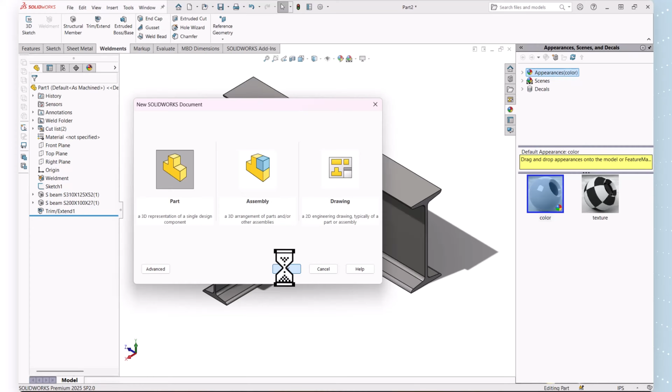So, let's begin. First, we'll change the appearance of the model as per our requirement, so it looks clean and easy to understand. Next, we'll change the unit system from IPS to SI because we are working in millimeters and metric units.

Now, select the required plane and start sketching the layout exactly as shown on the screen. This sketch will act as a path for our structural members.

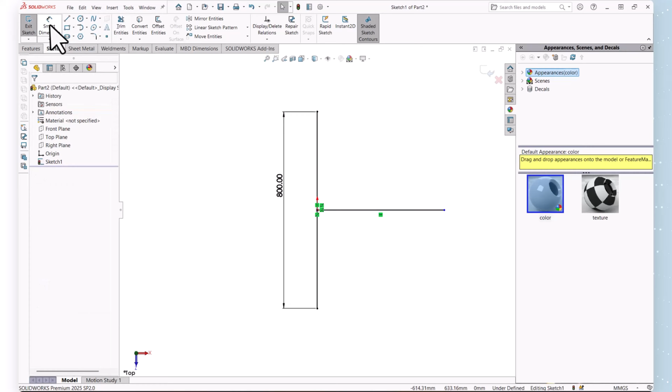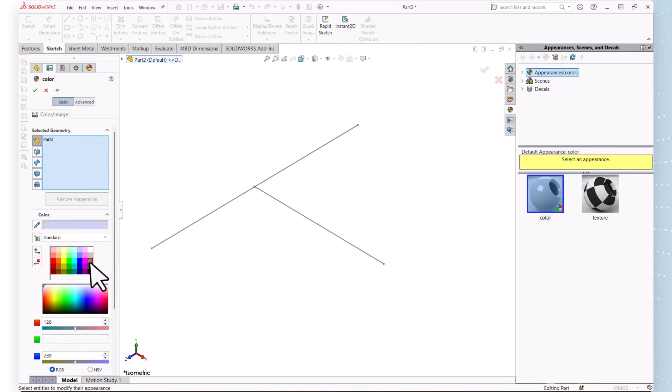After the sketch is ready, go to Weldments. Click on Structural Member. Then select DIN, choose S-beam, select the required beam size, and apply it exactly as shown in the video.

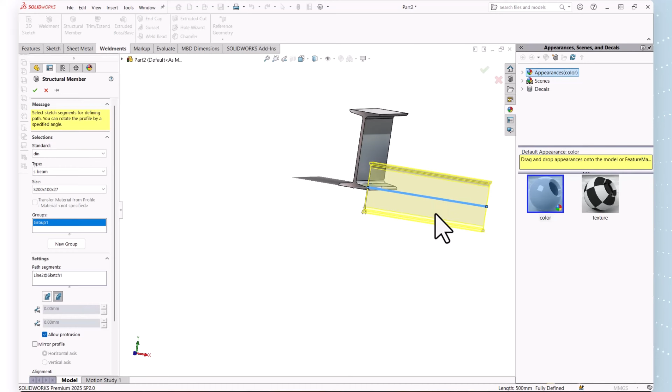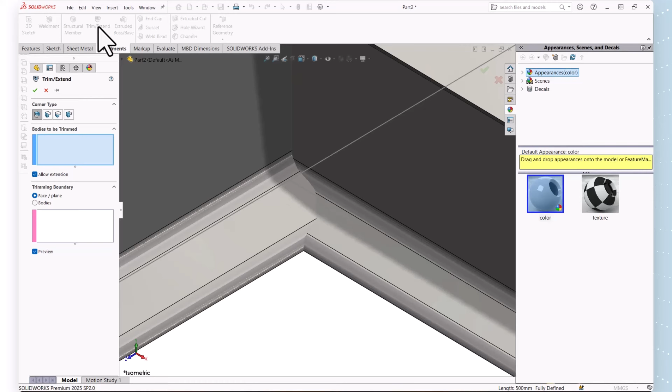Now comes the most important step, trimming the beams properly. Go to Trim Extend. As you can see, we have selected the beam to be trimmed and the boundary beam as a reference. Based on these selections, SolidWorks will automatically trim the joint correctly.

Watch carefully. When we apply trimming, you'll notice the beam end updates instantly and the joint becomes clean and fabrication ready.

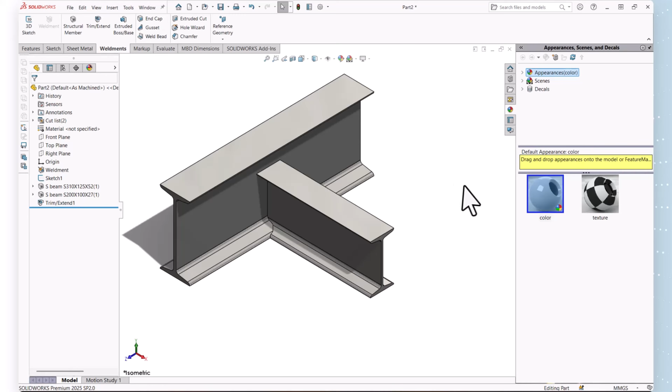Once trimming is completed, we'll start the welding process. Now go to Weld Bead. Select the required faces as per the video. Set the weld size and apply the weld bead on the joint.

And that's it. Our beam joint design and welding is completed successfully in SolidWorks.